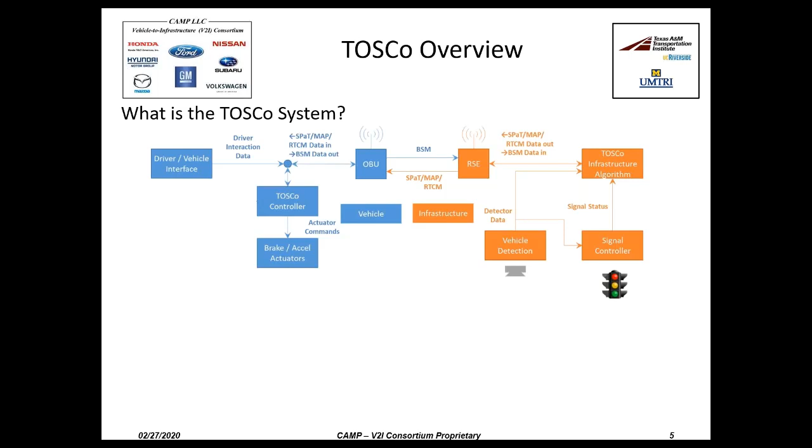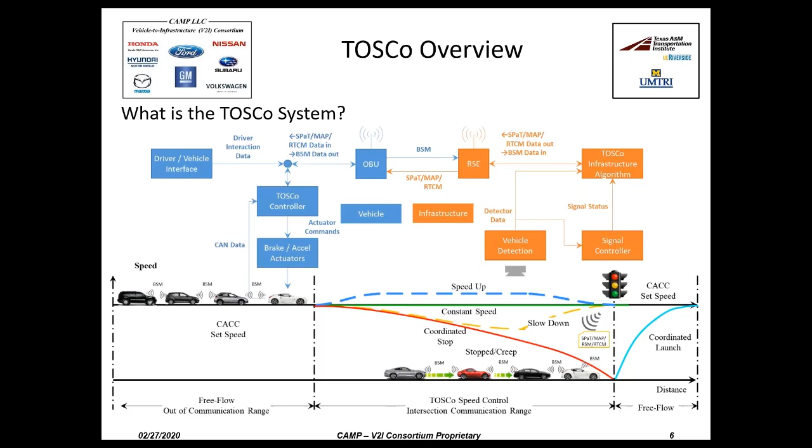The TOSCO algorithm provides a 1-degree autonomous behavior. It controls their speed as they approach the intersection. The driver is still responsible for steering and maintaining their position in the lane. But what TOSCO does is that as the vehicle approaches the intersection, it will make decisions once it enters communication range to either speed up, slow down, maintain constant speed, or if unavoidable, come to a stop at the intersection. The next few slides will describe these options in more depth.

So, as a vehicle is approaching the intersection, it has its set speed, that is the speed that the driver indicated that they prefer to travel. And once they enter communication range, they'll start receiving those messages I mentioned earlier, the SPAT, map, and RTCM GPS corrections.

That information provides a speed limit for the vehicle, so it is able to determine its optimal approach to the intersection. It will decide which method to use once it enters communication range and attempts to follow its best profile that allows it to cross the stop bar as soon as possible.

Now, if a stop is unavoidable, what the TOSCO vehicles will do is they will, of course, come to a stop. And as they begin to depart from the intersection, once it turns green and there are no vehicles queued in front of them, these TOSCO vehicles will perform what we call coordinated launch. This enables the vehicles to discharge that queue quicker, and any TOSCO vehicles next to each other will accelerate at close to the same time, behaving as a string of TOSCO vehicles.

So the first operating mode that we have listed here is the speed up operating mode. The condition for this is if the driver's current set speed is below the speed limit, the TOSCO vehicle will determine that it will accelerate to the speed limit, maintain that speed, and go back to the set speed after it crosses the intersection. The mindset behind this TOSCO control strategy is it allows the vehicles behind the subject vehicle to cross the stop bar at a sooner point in time.

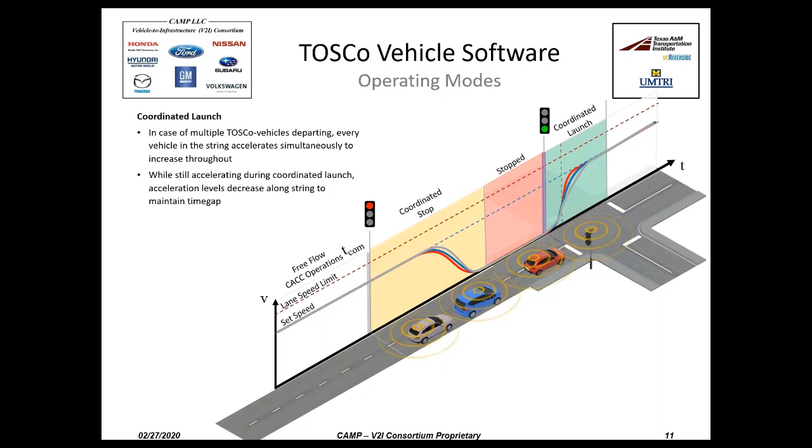And like I said, in a coordinated launch, if there are multiple TOSCO vehicles in a line, these TOSCO vehicles will begin departing at the same time. They will use gap control up to a certain speed and then start keeping a certain time gap between the subject TOSCO vehicle and the vehicle in front of it. The mindset behind coordinated launch is to increase the saturation flow rate, get more vehicles through that intersection in a certain amount of time than manually driven vehicles.

So to develop and evaluate TOSCO, we came up with 3 different simulation environments. Today I'll discuss in depth 2 of these. I will discuss the vehicle level simulation environment, developed mainly by other partners within the TOSCO team. I'll talk some about the infrastructure simulation environment that we use to develop these infrastructure algorithms that calculate some of that data necessary for TOSCO vehicles to approach an intersection. And I'll discuss in depth the performance assessment environment that we use to determine how TOSCO might impact State Highway 105, like I mentioned earlier.

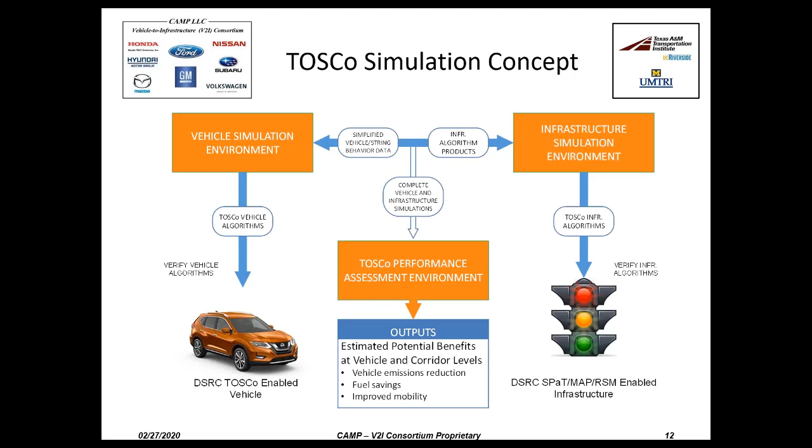The first simulation environment that I'll discuss is the vehicle level simulation environment. This environment represents TOSCO at a very low level. It represents how the radar on a vehicle would operate and the occlusion it would have between the lead vehicle and any vehicles around it. It represents DSRC communications and the BSMs between vehicles. And most importantly, it operates TOSCO as if the algorithm thinks it's driving a real car.

Now, to do all of that, it takes quite a bit of computational burden, and so we split this load across 3 different machines. The first machine on the far left, the development environment, is the machine that hosts TOSCO and operates the vehicle control as if TOSCO thinks it's operating a true real-world vehicle. This data is passed through the simulation environment, which hosts Simulink, and it processes data and translates information from the development environment to the traffic environment.

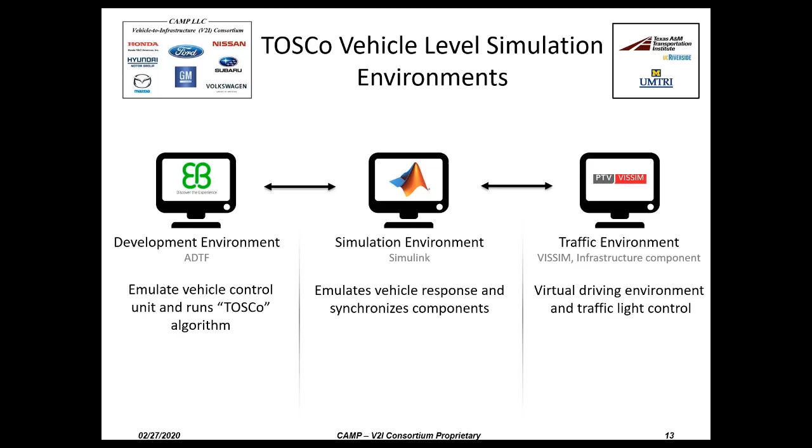Now, the traffic environment is where we have Vissim. It involves modeling the infrastructure component that enables TOSCO to behave the way it does, and it, of course, models the simulation of the vehicles at every time step as they go through. This environment enables us to represent TOSCO and develop TOSCO without needing vehicles in the real world. And it was a cyclic process and still remains a cyclic process to this day.

We start off defining our simulation objective and specifying what we want to alter. We'll enter the parameters into the simulation, run some simulations, plot the results, document and figure out what happened in these, identify any changes that we need, and develop the software to support those changes. And we repeated this process over and over again throughout phase 1 of the project and continue to do it now that we're in phase 2, as we continue to refine the TOSCO algorithm and test it using Vissim and the other software in this environment that is repeatable and reliable.

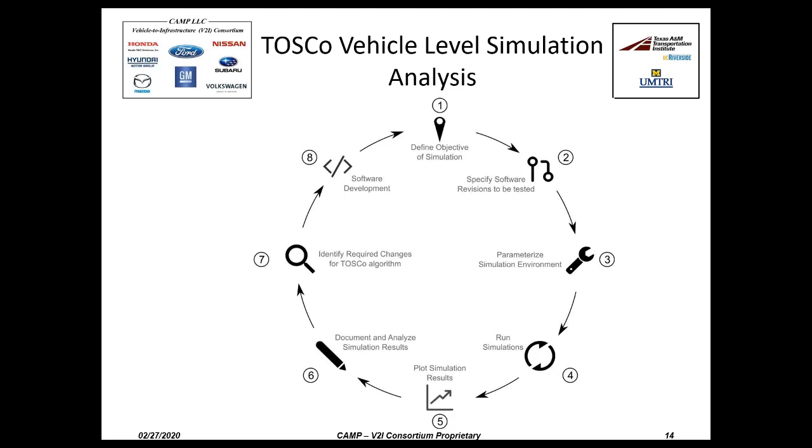So the key findings and key results that we had out of the vehicle level simulation: we were able to refine the TOSCO system using this vehicle level simulation and ensure desirable behaviors in each operating mode. We had simulations that set up the vehicles such that they enter the network and produce the different operating modes that I listed earlier in the presentation. We'd have one model for constant or speed up scenario, one model for the coordinated stop scenario, and other models that represent, say, if the string of TOSCO vehicles needs to split and some vehicles pass the intersection and other vehicles perform a coordinated stop.

We were able to refine these algorithms and determine that the initial speed profiles we started with TOSCO were actually insufficient because they didn't include initial acceleration. That was one of the main things we learned through the vehicle level simulation. As we tried to make our first set of speed profiles work and the governing behavior for TOSCO, we determined that we needed to refine them and include initial acceleration if we're going to make TOSCO work.

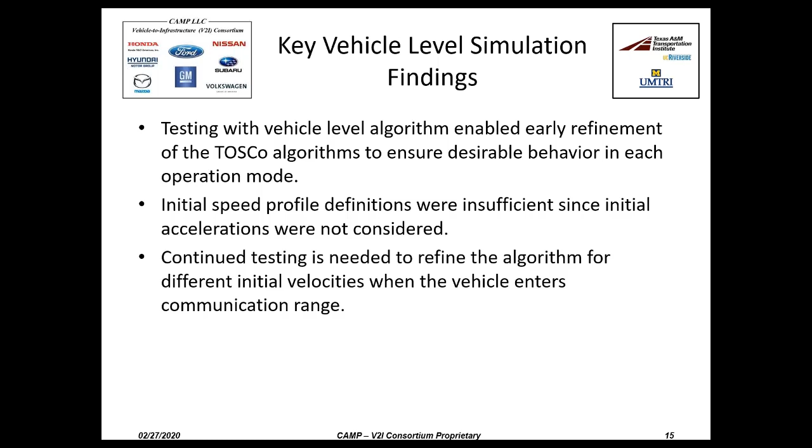Now that we're in phase 2 of this project, we're continuing to test the algorithm with the vehicle level simulation. We have the vehicles entering communication range, and we're changing the parameters and changing things up a little bit for these vehicles to further refine them without the cost and lack of repeatability we'd have in the field if we were to test these vehicles on a closed course. Now, the outputs from the vehicle level simulation enabled us to figure out how TOSCO would behave, which then fed into our development of the traffic level representation.

Like I said, TTI represented State Highway 105. This is in Conroe, Texas. It's a little bit north of Houston along I-45. The corridor we selected to model TOSCO is a 15 intersection across 12 miles running east-west between Conroe and Montgomery. The posted speed limits on this facility range from 45 miles per hour on the east end to 55 miles per hour on the west end. And actually, 55 miles per hour covers the majority of the facility. Only about one intersection on the far east end of the corridor is at the 45 mile per hour speed limit.

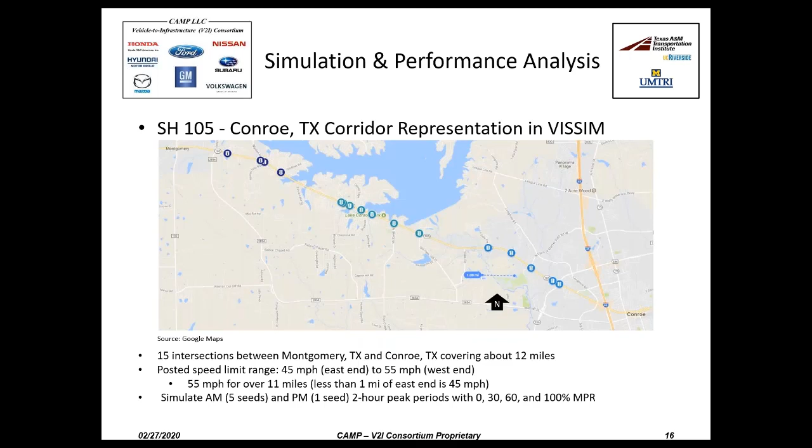To analyze TOSCO, we simulated the AM and PM peak scenario. We did a 2-hour peak period for the 2 of these. And we went through various market penetration rates of TOSCO, 30, 60, and 100%. To get the traffic level environment to operate thousands of vehicles compared to the 5 vehicles represented in the vehicle level simulation, we needed to simplify TOSCO slightly.

In the traffic level simulation, we don't represent, say, the radar and occlusion, but we use the driver model DLL API provided by Vissim to translate the gaps between the vehicles and other data necessary and represented by the radar and so on a real vehicle. Our infrastructure algorithm uses the ASC3 virtual controller, like the vehicle level simulation, to take that signal phase and timing information and collect it for all 15 intersections so that it can send that information to the simulated vehicles. The driver model DLL in the traffic level simulation environment hosts the TOSCO behavior.

We took the TOSCO algorithm and simplified it such that it would operate thousands of vehicles at the same time, using the same TOSCO logic represented by the vehicle level simulation. This simulation we also utilize the emissions DLL API from Vissim so that we could calculate the emissions produced by TOSCO. Because one benefit that we foresaw of TOSCO is that it could perhaps change the amount of emissions generated by vehicles because vehicles are not coming to a stop as frequently.

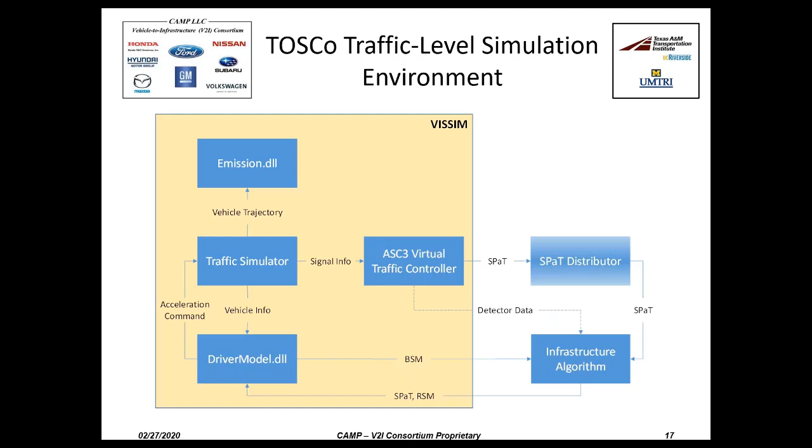To operate State Highway 105, we need a little bit of information. We collected the signal timing plans provided by the city of Conroe, Texas, and we collected turning movement counts at each intersection so that we had the right inputs into the data for our respective time periods. We calibrated the simulation based on travel time studies, tube counts at 5 different locations along the facility, and we determined that we actually needed to calibrate the acceleration behavior.

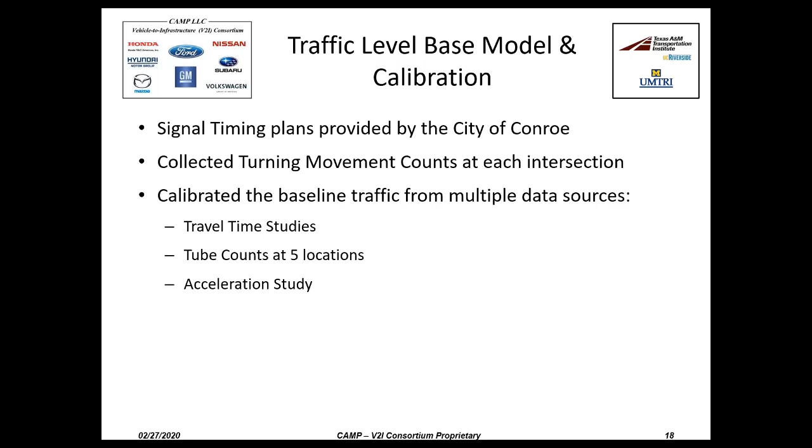Now, why did we calibrate the acceleration behavior? Well, when we showed this plot to our auto manufacturer friends, they said the non-TOSCO vehicles are accelerating quite aggressively. To put that, the blue line on the right is the TOSCO behavior as the vehicle accelerates from a stop. And the red line on the left is the acceleration of the default behavior from Vissim vehicles.

So we collected data to represent the true acceleration behavior of vehicles on State Highway 105 so that we could calibrate our model to more accurately represent it. The reason this is of interest to us is because we're developing a vehicle system. We need to be able to draw a comparison between the baseline traffic representing human drivers to the TOSCO algorithm that changes the acceleration for the vehicles that are equipped.

This change in acceleration behavior led us to recalibrating the simulation compared to when we didn't have the calibrated acceleration profiles. And we analyzed TOSCO for select market penetration rates for the AM and PM peak scenario after we calibrated to the travel times, volumes, and the acceleration behavior.

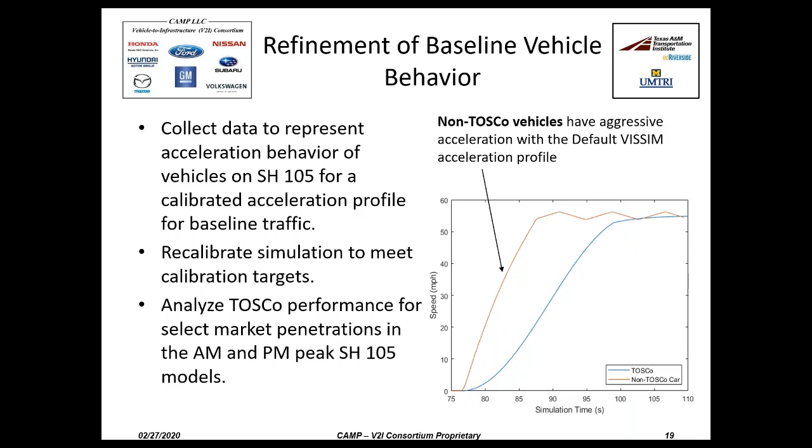Now, this slide represents some of the setup and findings from our acceleration study. This could be an entire presentation of its own. In summary, for the acceleration study, we took the default desired acceleration function represented by the plot on the upper right that has the distribution of acceleration for vehicles across speed as they accelerate from certain speeds up to their desired speed.

Our 8.9 feet per second squared is a pretty aggressive acceleration, especially when you compare that to our findings of about 2.5 or about 3 feet per second squared from a stop from our vehicles on Highway 105. We found this acceleration behavior using an accelerometer in some test vehicles that we took to State Highway 105.

We attempted to imitate the acceleration behavior of vehicles ahead or beside the vehicle that we had with an accelerometer, and we filtered the data so that we only had acceleration information of vehicles that were near the front of the queue so that they're not following somebody in front of them. This reduced the likelihood of vehicle interaction affecting the desired acceleration behavior, which is what we were trying to capture.

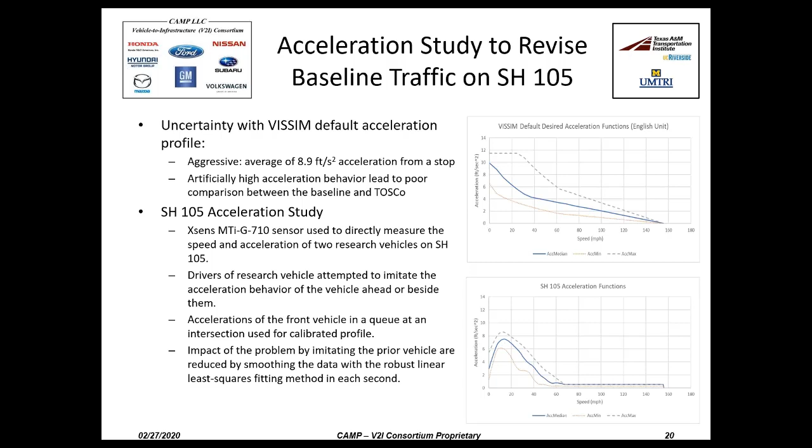And we smoothed the data and compressed all the acceleration profiles that we collected into these functions graphed here in the bottom right. You can see some pretty big differences between the two. One of the reasons the lower graph seems to level out and then extend up to a very high speed of about 155 miles per hour is so that any vehicles that have a desired speed higher than 65 would be able to accelerate to their desired speed eventually, given that they have very low acceleration after the point of 65 miles per hour.

This plot shows the differences. It has the same two lines as before. The red line is now a dot dash red line, and the blue line hasn't changed for the TOSCO behavior. The new yellow dashed line is the manually driven behavior with the calibrated acceleration profile. You see that the TOSCO vehicles still accelerate slower than the non-TOSCO vehicles with the revised acceleration profile.

But you also see that the revised behavior has the vehicles taking longer to accelerate up to their desired speed. And the revision of the acceleration behavior here shows acceleration that is more consistent with the literature on how vehicles accelerate from a stop.

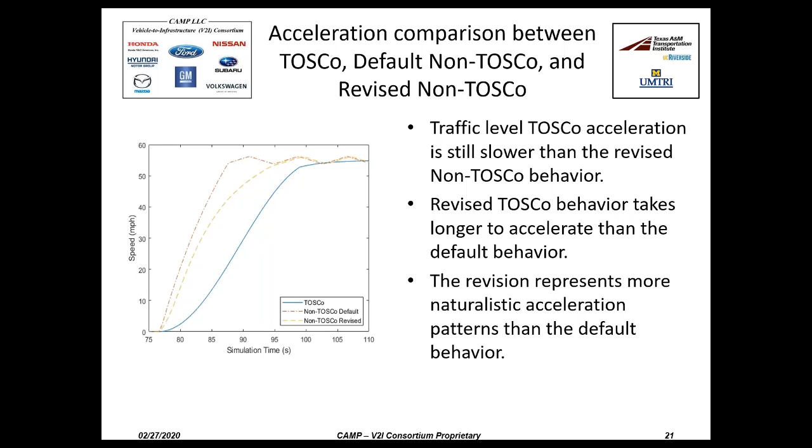So some of the results that we have from the simulation are represented in this slide. This slide represents the total delay and stop delay of the AM peak simulation.

It shows the eastbound and westbound direction. For this time of day, the eastbound direction is the peak direction. And you can see that the total delay increases as market penetration goes up and the stop delay decreases.

Now, this isn't exactly a surprising result. We expected this to some degree in moderate traffic because TOSCO's main strategy for avoiding a stop at the intersection is to slow down and come to a speed such that they do not need to stop. And naturally, one could expect that slowing down leads to some increase in total delay.

What you need to focus on for this graph is that the stop delay goes way down. We're talking it goes from close to 50 seconds all the way down to 10 or even 5 seconds for the westbound direction. And this shows that TOSCO is helping the vehicles remain in motion so that they are not spending a bunch of time queued at the intersection.

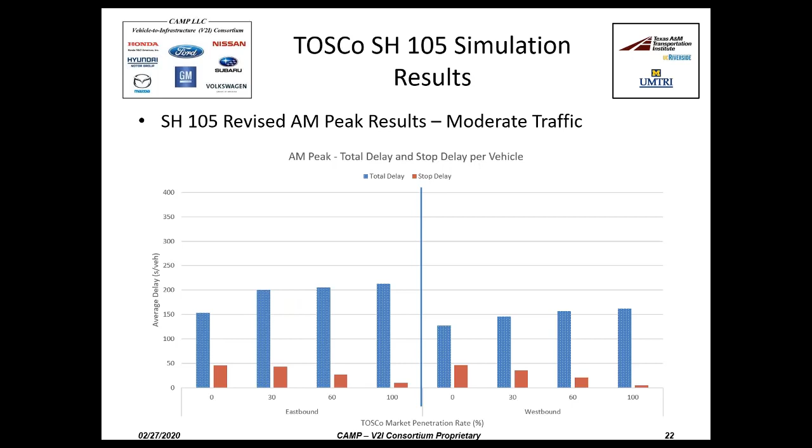Now, the PM peak simulation shows a slightly different story. The PM peak has several intersections along the facility that are in a saturated condition, meaning that the queues never really clear. The signal timing does not allow all the vehicles to cross the stop bar.

When TOSCO vehicles are able to accelerate faster, they're able to accelerate with less lost time. That is, they don't need a human to react as the vehicle in front of it begins to accelerate. And so coordinated launch enables TOSCO vehicles to clear that queue faster.

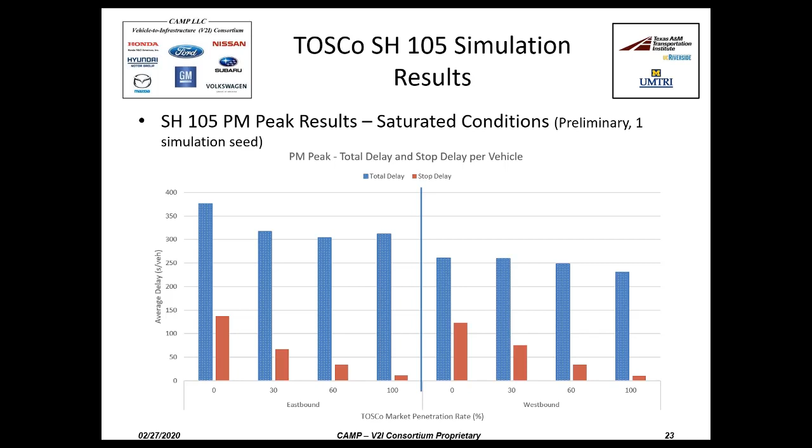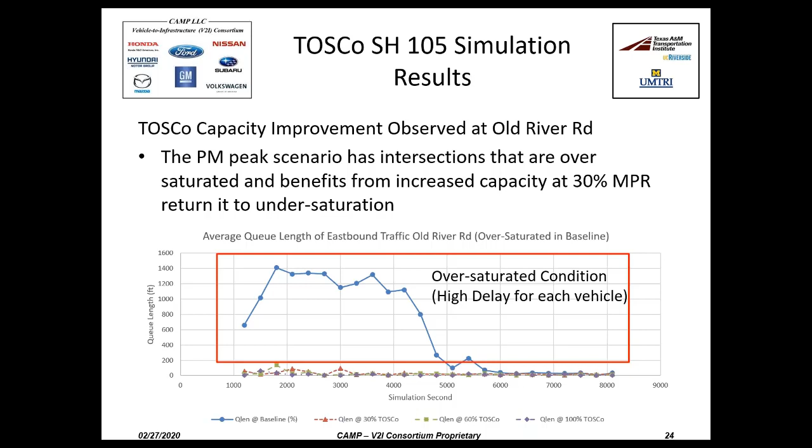You can see that the other three market penetration rates, the 30%, 60%, and 100%, remain at near zero queues. And so this indicates to us that adding TOSCO to the vehicle stream in an overcapacity scenario can help increase your capacity such that there is no longer a residual queue at that intersection.

So in conclusion, in light traffic represented by the AM peak scenario, TOSCO is able to reduce stop delay and number of stops, but it increases total delay. TOSCO vehicles experience this higher total delay because they currently accelerate slower than baseline traffic and will slow to the speed limit if necessary while in communication range of an intersection.

One of the things that we're looking at in phase 2 of this project that is ongoing is what sort of acceleration parameters can we provide to TOSCO such that it is more consistent with the accelerations recorded on State Highway 105. How can we allow TOSCO to accelerate faster and perhaps see more benefit of the TOSCO system?

Now, in heavy traffic, TOSCO is able to reduce total delay, stop delay, and number of stops. The increases in capacity are from reduced headways in the TOSCO strings, and they're great enough to overcome the average increase in total delay by the TOSCO driving behavior. We didn't change behavior between the AM and PM peak scenario.

TOSCO's goal was still to slow at an intersection such that it can cross the stop bar during the green window. But when there's heavy traffic, there's not really a green window for those TOSCO vehicles. And so we know that it is the coordinated launch behavior, the reduced time to startup and the reduced headway between vehicles, that enabled TOSCO to increase capacity at one of our intersections and to reduce the total delay.

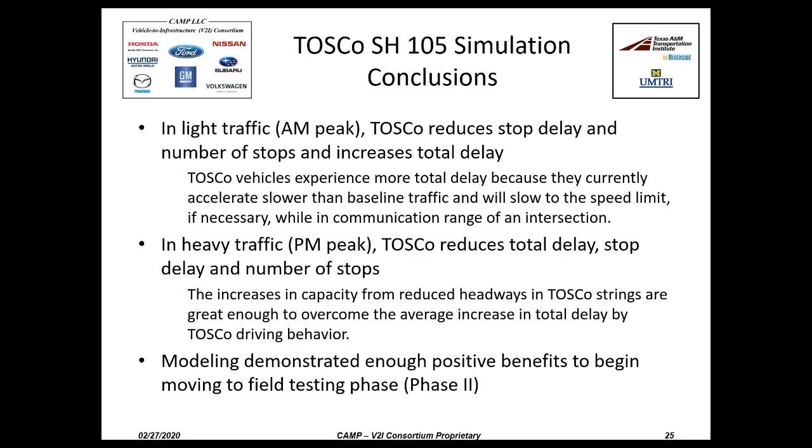Now, some of the challenges that we had in the TOSCO simulation was getting all the different software and different computers to talk to each other in a synchronized fashion. The synchronization between multiple machines for the vehicle level simulation and different pieces of software in the traffic level simulation proved to be a challenge. We had to get the software to wait and listen to hear bytes from another piece of software or another computer so that TOSCO could operate like it will in the real world.

We had to compare the TOSCO behavior to the baseline traffic. Like I discussed, our acceleration was very important. The input acceleration for that baseline traffic proved to be very important for the comparison of TOSCO, which is unique to developing a system and a low-level vehicle behavior using Vissim.

And we had to record speed trajectories, like I showed several of here, to describe how the vehicle started up from a stop. And we had to record signs of oversaturation and somehow quantify it beyond level of service F. We wanted to show when and how oversaturation was produced, and when the intersection was no longer oversaturated.

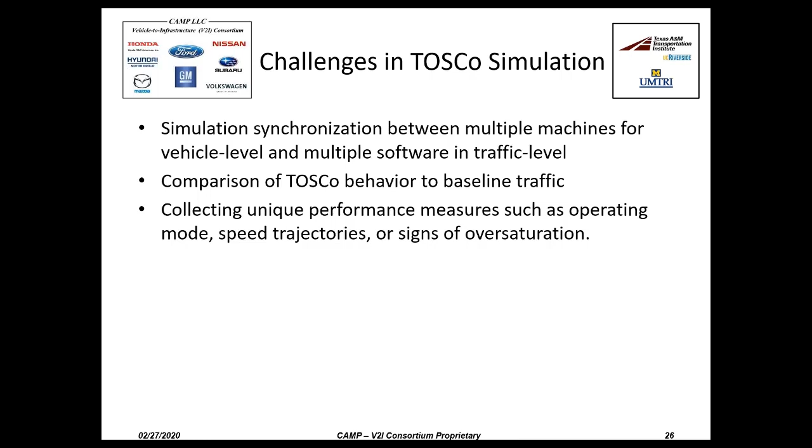We'll conduct verification testing on this facility and verify that the real vehicles are able to perform as we expect, and as TOSCO should. We're going to integrate any refinements to the TOSCO vehicle logic into our traffic level simulation so that we can rerun this and see how our refinements impact State Highway 105.

And given funding from FHWA, we plan to deploy this system on State Highway 105 and run TOSCO vehicles through the live intersections along the facility so that we can further refine the system and prove that TOSCO is able to operate and improve the performance on State Highway 105.